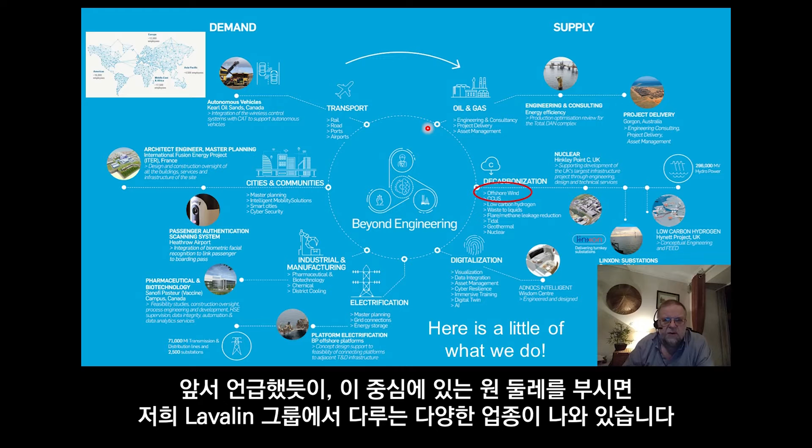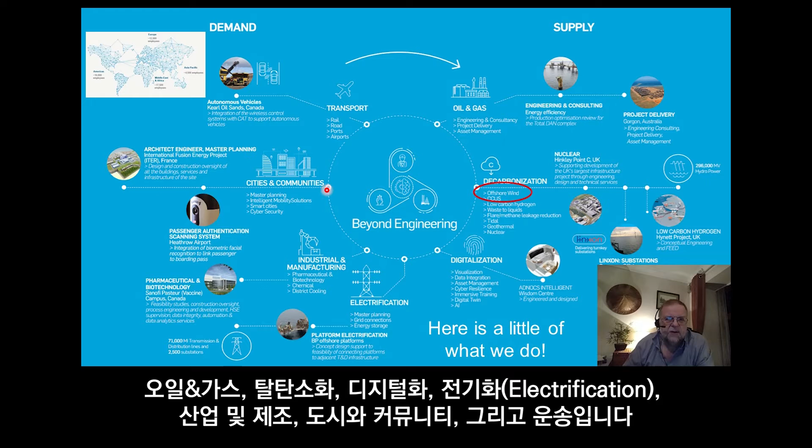Now here is just a little of what we do as SNC Lavalin. You can see around the ring in the centre here all the different industries that we work for: oil and gas, decarbonisation, digitalization, electrification, industrial and manufacturing, cities and communities, and transport, both catering for the demand for services and the supply of those services. Around the outside here we have some of the major projects that we've worked on.

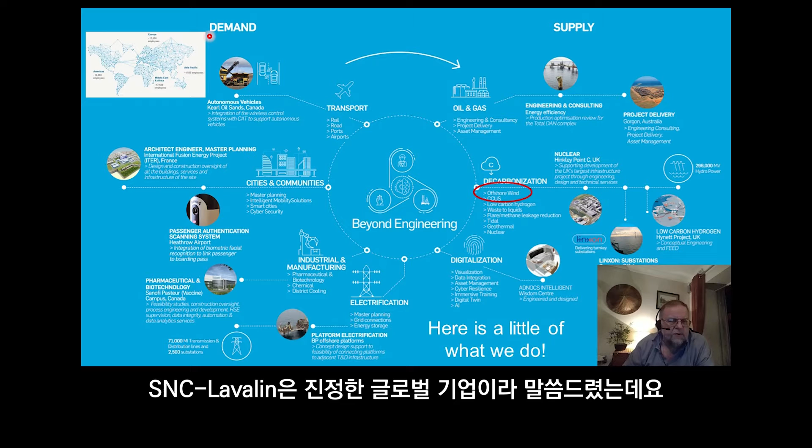Now, I mentioned that SNC Lavalin were a truly global company. We in fact work in 50 different countries throughout the world. We have 50,000 employees at the last count. Those employees are from 130 different countries in the world, and we speak 70 different languages.

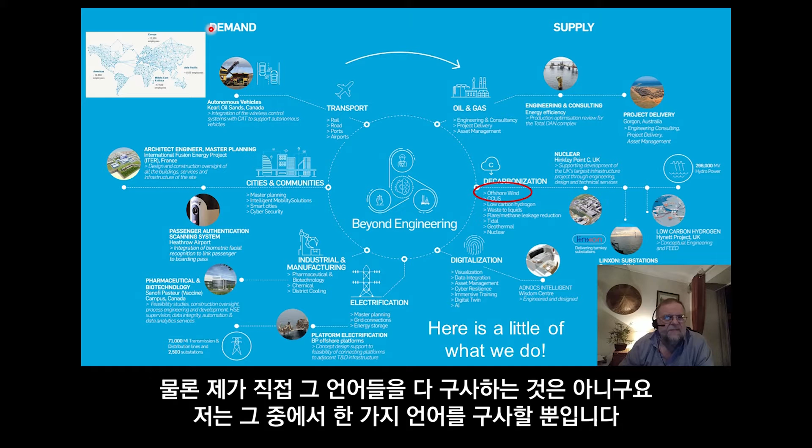Certainly not me personally, I'm afraid I only contribute one of those languages.

We undertake studies at various levels, from the overall design of the wind farm down to individual components. We handle permitting and consent for the wind farms. This is the main area that we're going to talk about today, the concept design of offshore wind farm support structures. We also do front-end engineering design and detailed design.

We don't operate installation vessels ourselves, but we do manage those. And we look after the structures throughout their life: asset management, operations and inspection, structural integrity management of those structures. And we provide a number of different services for the offshore wind sector as well.

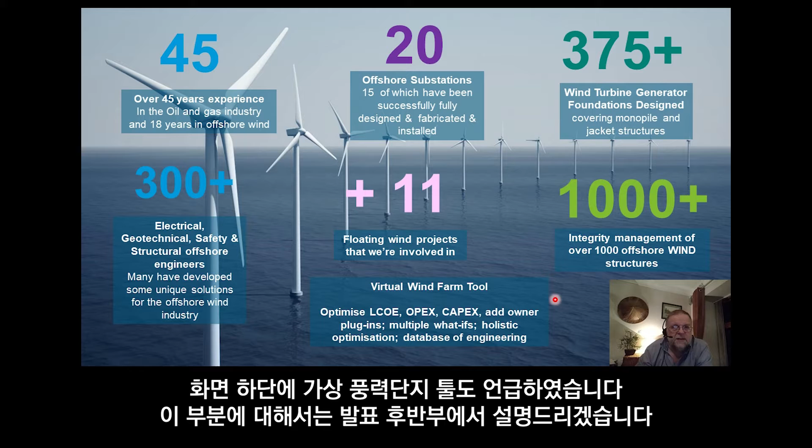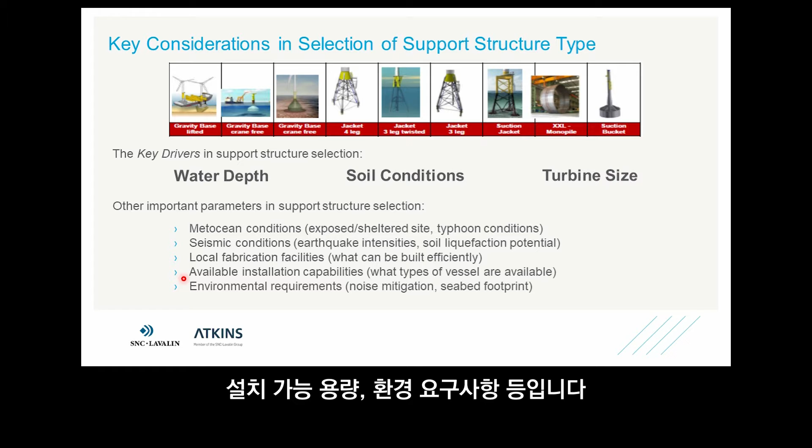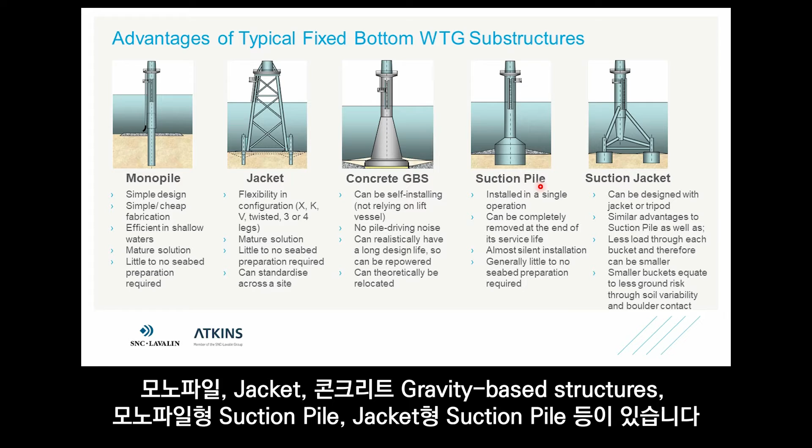The key drivers in support structure selection are water depth, soil conditions, and turbine sizes. There are a number of other parameters that are important in substructure design selection, such as the metocean conditions, like the wave and wind conditions, the seismic conditions, local fabrication facilities, available installation capabilities, and environmental requirements. There are a range of typical fixed-bottom WTG substructures available for designers to utilize, such as monopiles, jackets, concrete gravity-based structures, suction piles with monopiles, and suction piles with jackets.

Monopile designs have been utilized across the world. There are a number of benefits to these designs: they are very simple, they are easier to fabricate, they're very efficient in shallow waters, and they require little to no seabed preparation. Jackets are designed with either 3 or 4 legs with a range of different brace configurations. Again, they're a mature solution that requires little to no seabed preparation, with jackets suitable for deeper water depths.

Concrete gravity-based structures can be self-installing, as they don't rely on a lift vessel, there are no pile driving noises, and they can realistically have an extremely long design life, so can be repowered. Suction piles can be installed in a single operation and can be removed at the end of their service life. Installation is almost silent, and it generally requires little seabed preparation. Suction buckets can also be used with jacket designs, thereby reducing the load through each bucket.

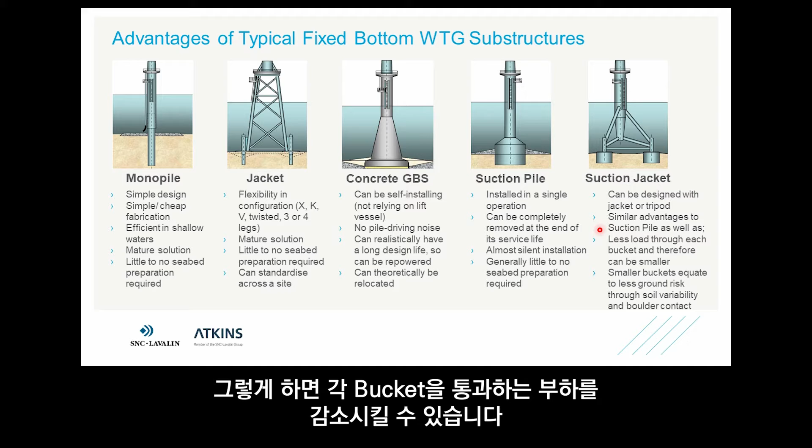Well, thank you very much, Matt. One key thing we're trying to bring out here is how rapidly the design of offshore wind turbine structures has been changing in recent years. Just 10 years ago, we were looking at turbine sizes up to 5 megawatts, rotor diameters less than 100 meters. Gravity-based foundations were being used in shallow water only, and monopile structures were restricted by the behavior of the soil and what diameters you could actually build.

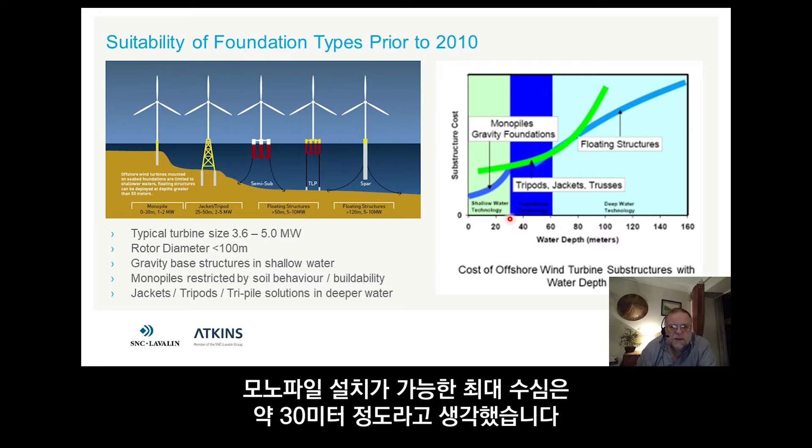Jackets, tripods, and tripiles were accepted in deeper water, but the industry anticipated that floating structures such as the spar structures at Hywind would be used for deeper water. The maximum water depth for monopiles was considered to be around about 30 meters. However, it was realized that monopile structures in particular were behaving better than was anticipated.

So this instigated the PISA project to look into the performance of soils for very large diameter monopiles, and that did indeed show that the soil performance was much better than originally anticipated for smaller diameter piles. Coupled with other technology improvements like the ability to roll larger diameter and thicker steel plate, improvements in installation vessels, pile driving technology, noise mitigation, and the fatigue performance of welded joints allowed monopile structures in particular to grow significantly in size.

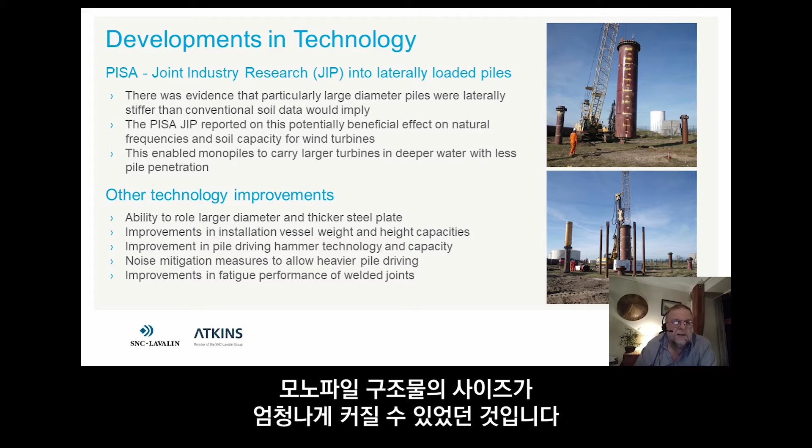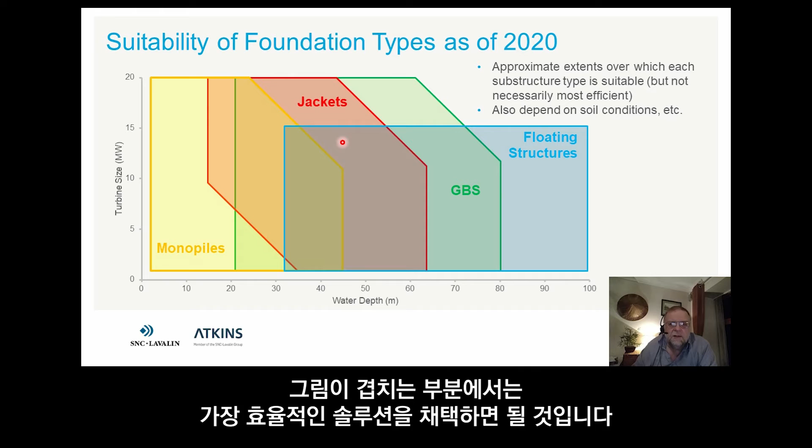As a result of this, the suitability of foundation types was able to be extended to consider larger turbine sizes and over deeper water before you have to switch to floating structures. So the approximate extents that are shown here show where those structures might be suitable, but where these diagrams overlap, then the most efficient solution would be chosen, also dependent on soil properties at the site.

As mentioned, soil conditions are a very important driver in the selection of substructures for wind turbines. In sand conditions, the suction piles tend not to be favoured because of the possibility of piping during the installation of the piles. Gravity-based structures tend not to be suitable on soft clay and would need dredging out of soft surface materials.

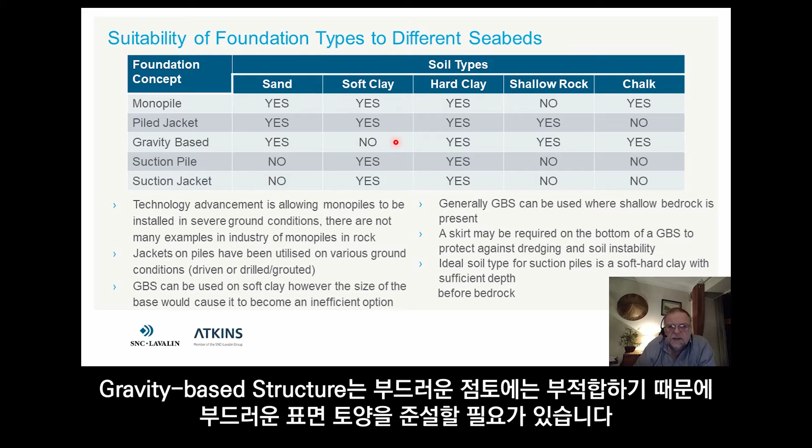And shallow rock tends only to be suitable for pile jackets, which can be drilled and grouted into that, or gravity-based structures which sit on top. And chalk soils are not good for piled solutions for jackets because of the reduced skin friction in weathered chalk.

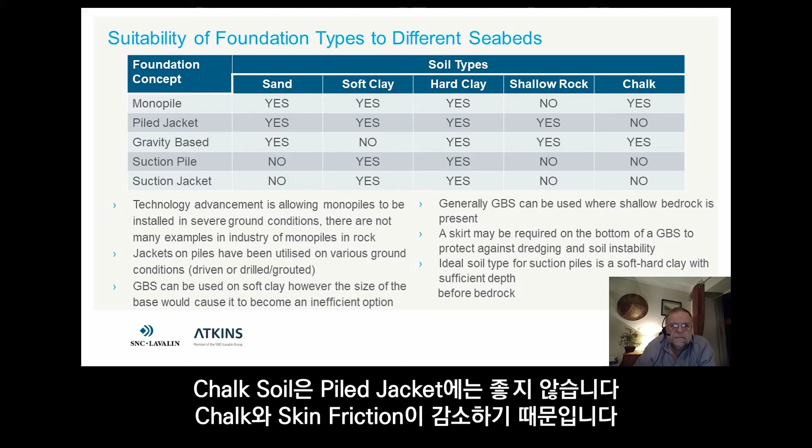Some other design drivers are worth mentioning for substructure selection. In seismic regions where there is a risk of soil liquefaction, then certain types of foundation may not be suitable. Where there are typhoon conditions, these give extreme loads on structure, which may well be limiting in design and restrict the type of substructure that may be selected.

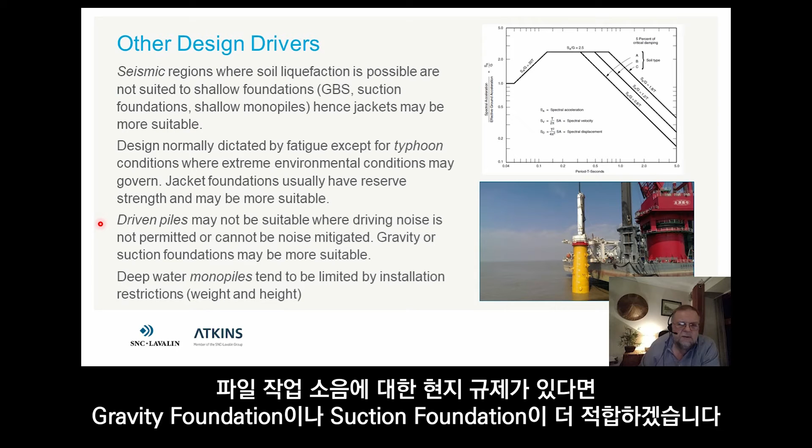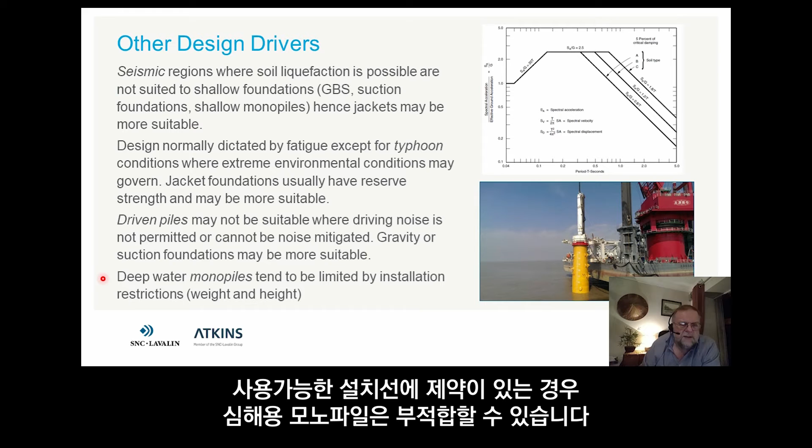Where there are local limitations on the noise of driving piles, then it may be more suitable to use gravity or suction foundations. And similarly, where there are limitations on the installation vessels available, then deep water monopiles may not be suitable.

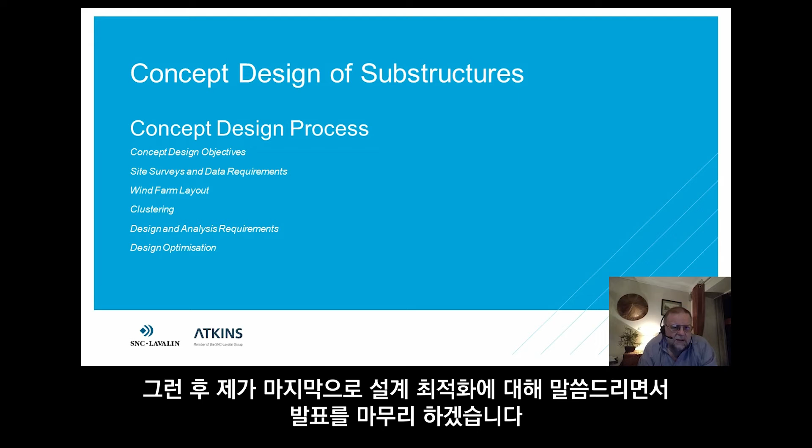Well, that introduced the types of substructure that might be selected for a particular wind farm. We'll now go on to talk about the design process which is used to progress the concept design. I'll start off by talking a bit about the objectives and the data requirements for that, and also a little bit about the wind farm layout. Matt will then take over and talk about some of the processes of selecting, clustering, and analysis requirements. And I'll finish off this presentation with an introduction to design optimization.

The process through the design of an offshore wind farm can vary quite significantly, but this figure is a fairly typical approach. Concept design followed by front-end engineering design followed by detailed design. In the concept phase that we're interested in here, we're taking the data about the site, and we're using that to decide on a layout for the wind farm, a selection of the turbines, support structure selection, how those designs of substructures are clustered into groups, and what the initial sizing of those are.

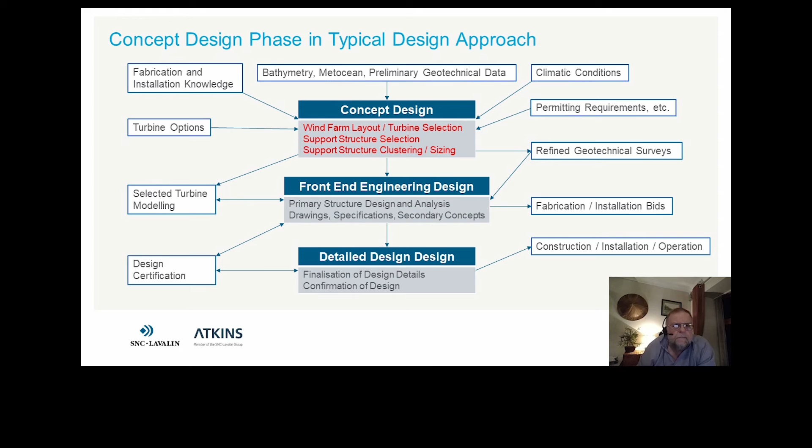That initial layout can allow us to do more refined geotechnical surveys, to use data from the selected turbine manufacturer, and to use that information in a further design of the substructures. Some of the other presentations in this series of webinars will have described the data requirements for offshore wind farms. So I'll pass over this fairly briefly. Initially, though, we do need geotechnical data for the site for concept design. Subsequently, that would be refined for more detailed design.

We're looking for climate and metocean data, the effect of the environment on the structure, and we're also looking for the effect of the structure on the environment, i.e. what local wildlife is there, who else uses the local ocean, and if there is any risk of unexploded ordnance in the vicinity.

We feed all of that data into a tool that allows us to build a virtual model of a wind farm. Hence, it's called the Virtual Wind Farm tool. It takes all of that initial data, works out what the wind energy yield is, the amount of power that you generate from the wind farm, takes into account local databases of turbines and fabrication and installation facilities. And then it allows the selection of the turbine type, the substructure, and/or the foundation concept by accumulating the through-life costing of the development.

That covers the design, the fabrication, the installation, the operation and maintenance, the decommissioning, and the financing of the wind farm. And finally, we can work out from that the capital expenditure, the operational expenditure, and the levelized cost of energy. And that allows us to select the most efficient design for that particular wind farm.

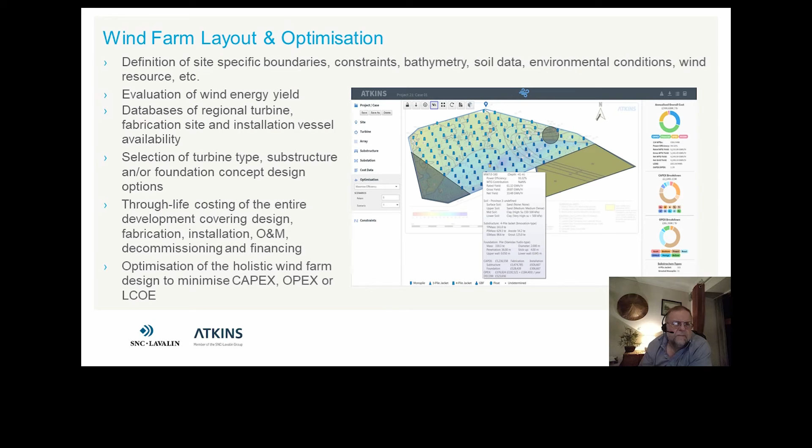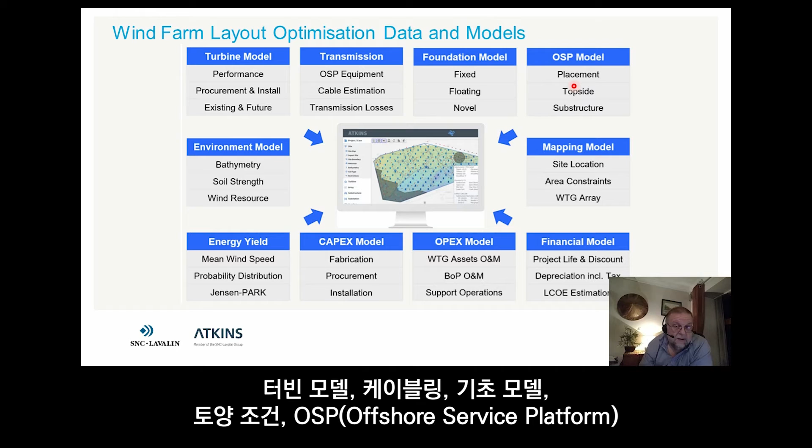This is an illustration of all the data that feeds into that optimization process. The turbine model, the cabling, the foundation model, the soil conditions, the OSP, the offshore service platform, the environment, the energy yield that you're getting, the capital expenditure from building and installing the sites, the operational expenditures, the locations of the individual turbines, and the financial model, how much it's going to cost to do that development.

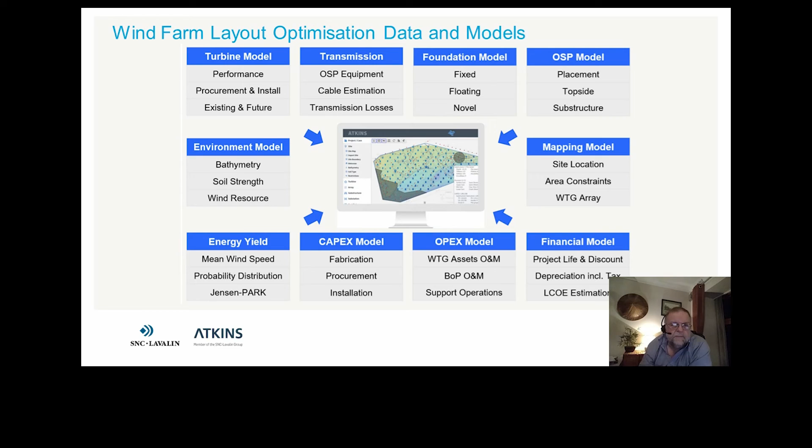Clustering is the grouping of designs to standardize construction and reduce design and analysis schedules. For example, if you have a site with 50 WTGs, you don't want to design a single structure to fit all 50 sites. You may want to design 4 or 5 different substructure groups or clusters. Clustering is dictated by the water depth variability across the entire site and the soil variability.

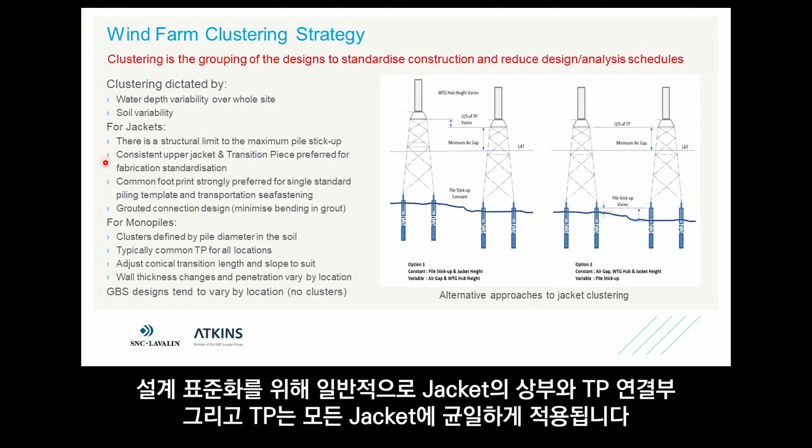For jackets, there's a structural limit to the maximum pile stick-up that you can use. For standardization and design, the upper part of the jacket and connection into the transition piece and the transition piece itself tend to be standardized across all the jackets. A common footprint across all clusters is strongly preferred, as then it only requires a single standard piling template, and it makes transportation easier due to requiring one configuration of sea-fastening.

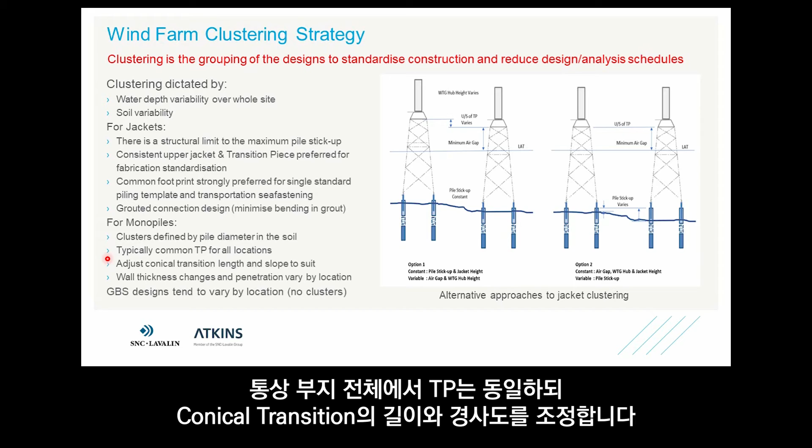For monopiles, clusters are defined by the pile diameter in the soil. Typically, they have a common TP across all sites and require a different conical transition length and slope to accommodate. Wall thicknesses and pile penetrations vary by location. Gravity-based designs tend to vary by location, i.e. clustering is not required.

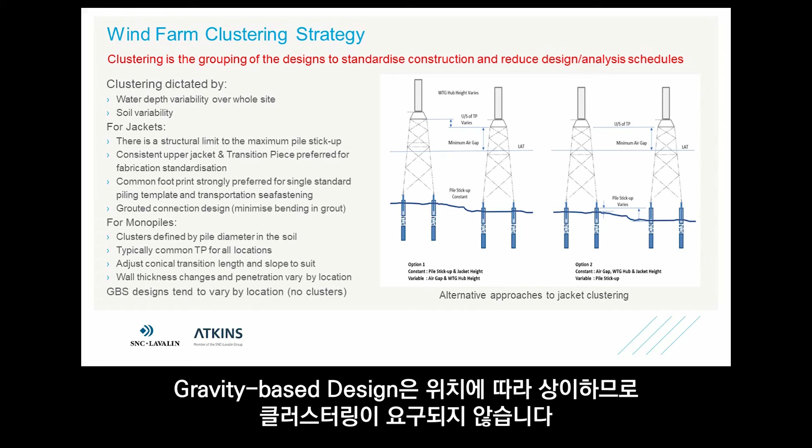When designing WTG substructures, the dynamic effects of the turbine in sea states must be accounted for. Turbine dynamic loads include the rotational frequencies such as 1P, which is a full rotation of all the blades, wind turbulence, the effects of each blade individually passing the tower, which is the 3P frequency, and the blade natural frequencies. The natural frequencies of the turbine, often known as 1P, 3P, 6P, and moving upwards, are often given as fixed values or a range of values in a Campbell diagram.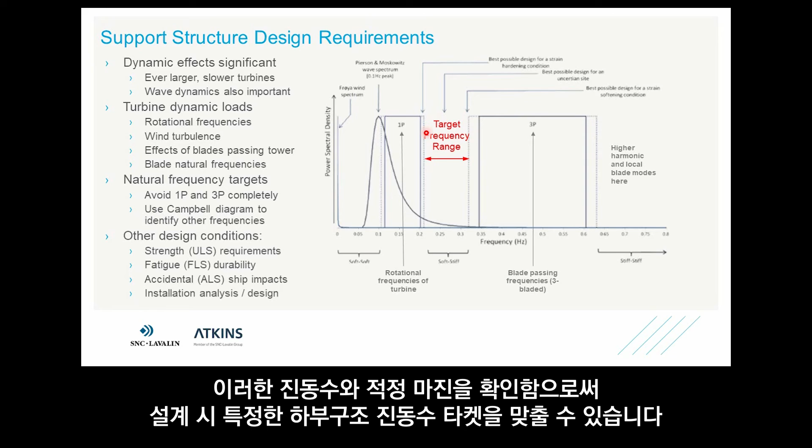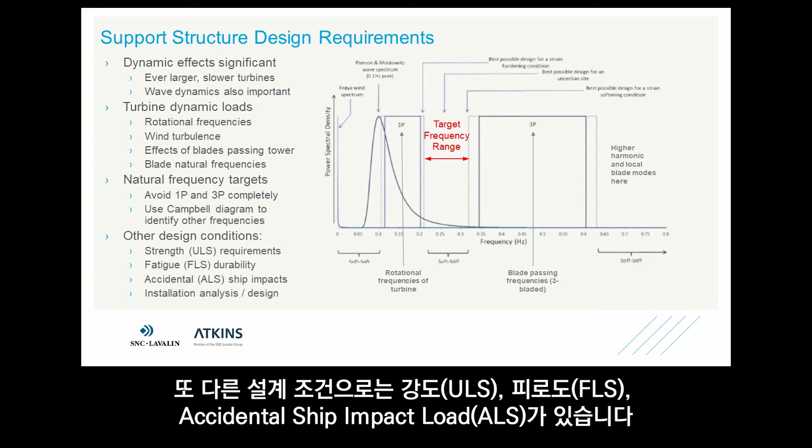Understanding these frequencies with the relevant margins allows for designers to target certain substructure frequencies. Other design conditions include strength, also known as ULS, fatigue, known as FLS, and accidental ship impact loads, known as ALS. Additional installation analysis may be required, such as transportation, lift, or on-bottom stability.

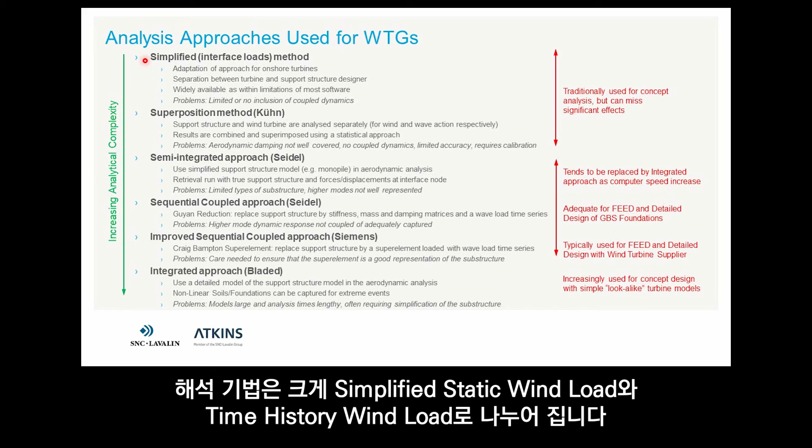There are a number of analysis approaches used by substructure designers, each with increasing analytical complexity. Broadly speaking, the analysis methods can be split into simplified static wind loads and time history wind loads. The simplified interface loads method is the crudest and is often used for preliminary concept design. This assumes that the turbine loads can be simplified and statically applied at the tower and TP interface. For example, a single point load, representing the maximum turbine load experienced, might be applied at the interface point. However, as the loads are simplified, there is no inclusion of dynamic effects and the method has limited accuracy.

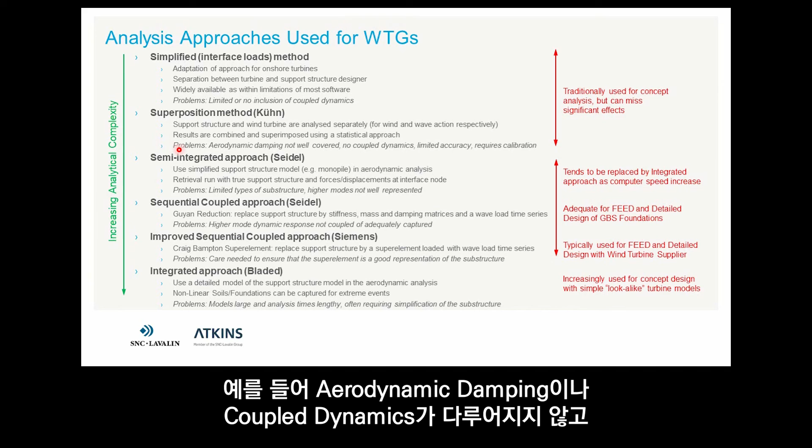The superposition method allows for fatigue analysis to be performed using simplified loading. This assumes that the wind and wave fatigue analysis can be performed separately before combining with statistical approaches. The wind loading is simplified to a range of statically applied loads at the interface, representing turbine loads for different conditions across its life. The method can be used as a preliminary approximation of the fatigue lives. However, there are a large number of simplifications for this analysis type, such as aerodynamic damping is not well covered, the coupled dynamics are not covered, and it has limited accuracy.

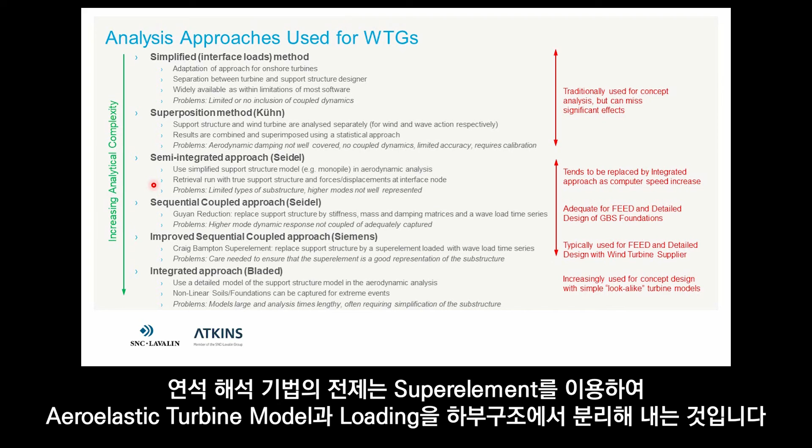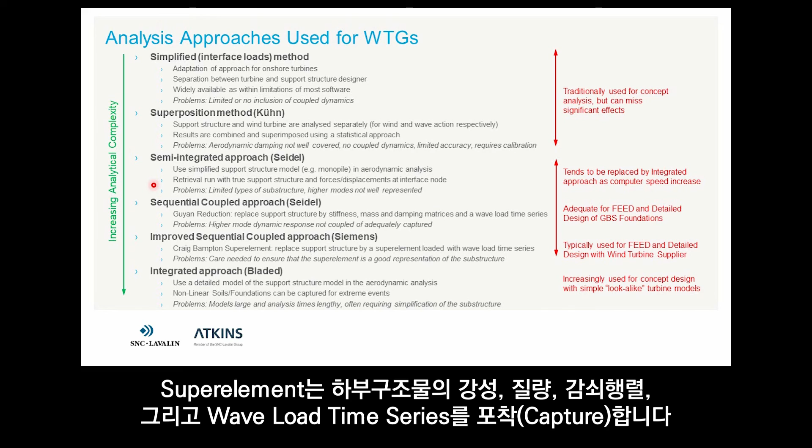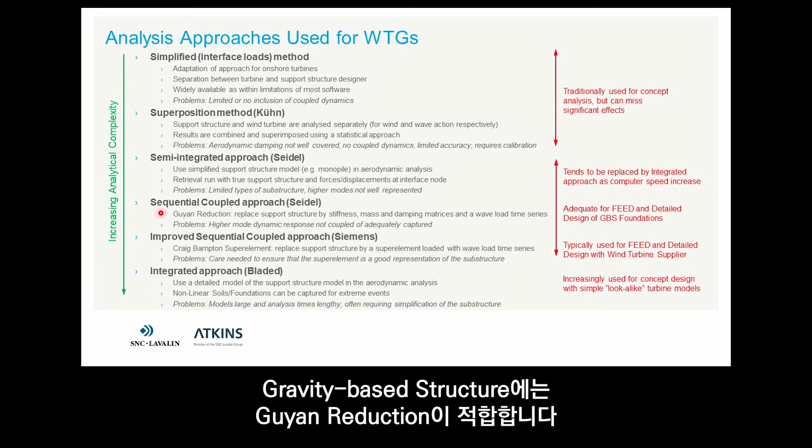There are a range of coupled analysis methods available. The premise of these is to separate out the aeroelastic turbine model and loading from the substructure through the use of superelements. The superelements capture the substructure's stiffness, mass, and damping matrices, along with a selection of wave load time series. The superelements are fully linearized below the interface elevation, meaning that no nonlinear soils can be modeled. Guyan reduction is suitable for gravity-based structure design. However, it does not capture higher modes' dynamic response well, which aren't required for gravity-based structures. Therefore, it isn't suitable for jackets or monopile design.

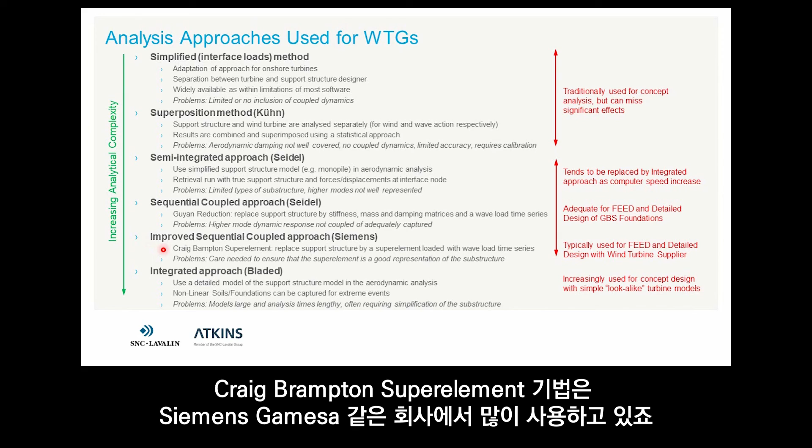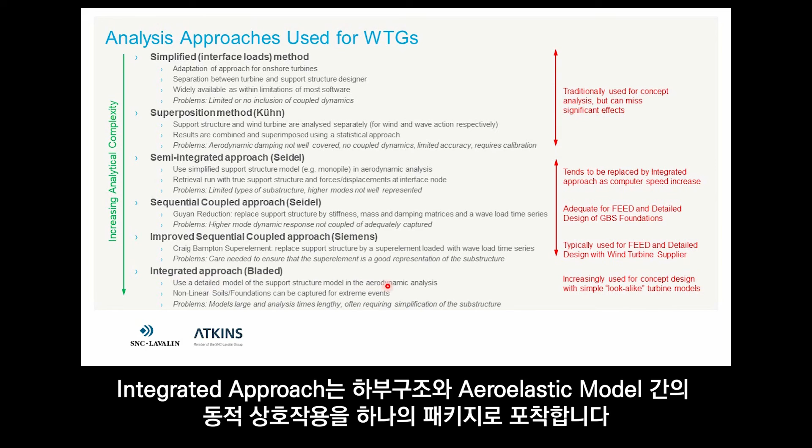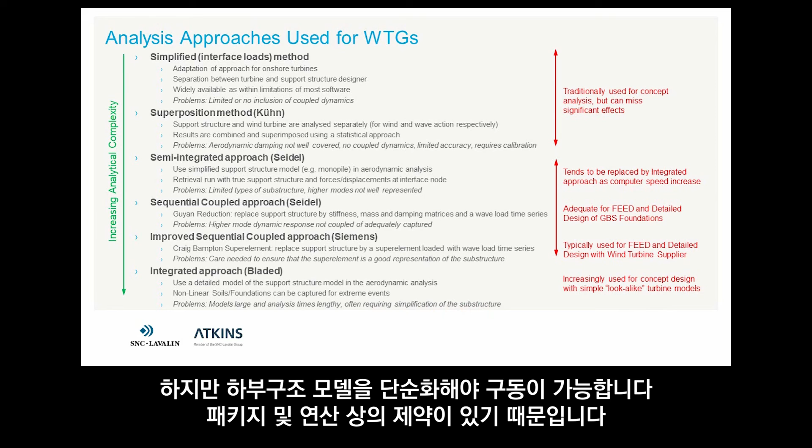The Craig-Bampton superelement method is widely used by companies such as Siemens Gamesa. This method of reducing the superelement captures the higher modes more accurately and as such can be used for monopile and jacket design. The integrated approach captures the dynamic interactions of the substructure and the aeroelastic model in a single package. The wave and wind time series are captured simultaneously in the single software, without the need of superelements. This allows for nonlinear foundations to be captured. Packages such as DNV-GL's Bladed software allow this to be done. However, the substructure model often requires simplification to run due to the package and computational limits.

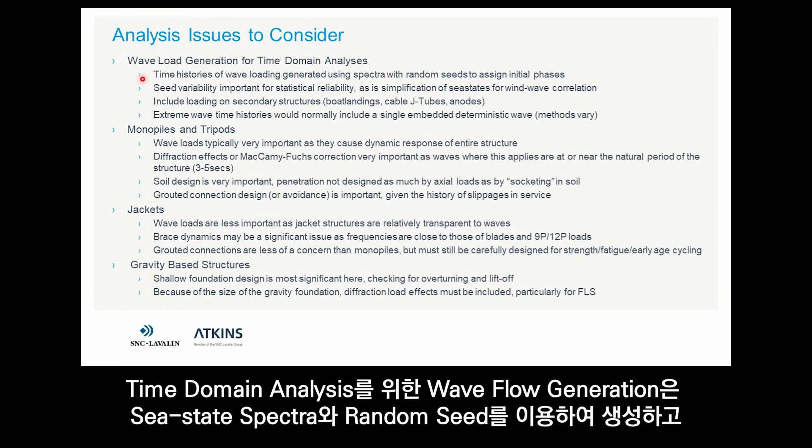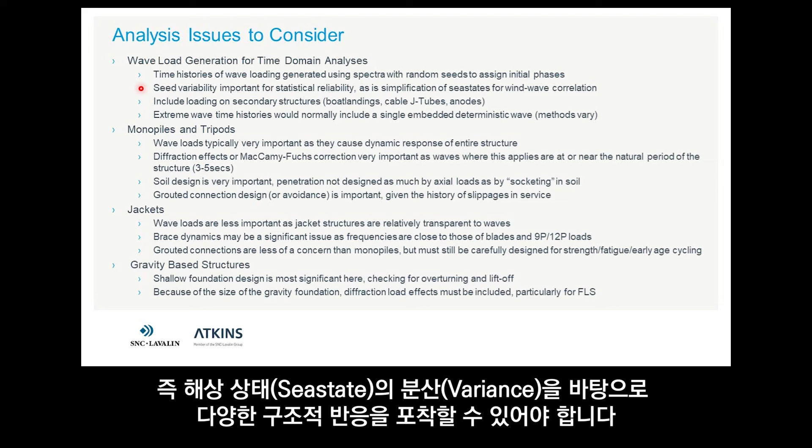Wave load generation for time domain analysis is generated using sea state spectra and random seeds to assign initial phases. Seed variability is important for statistical reliability, i.e., we require a variance of sea states to ensure a range of structural responses is captured. As much as possible, loads are generated on the full structure, including any secondary steel like boat landings or J-tubes for the cabling.

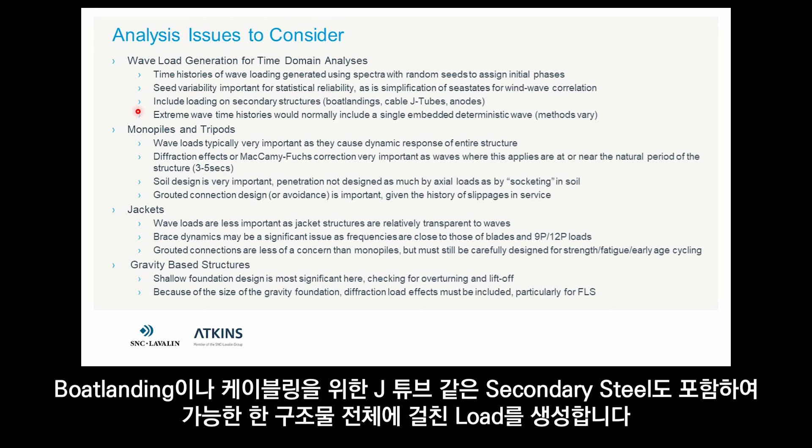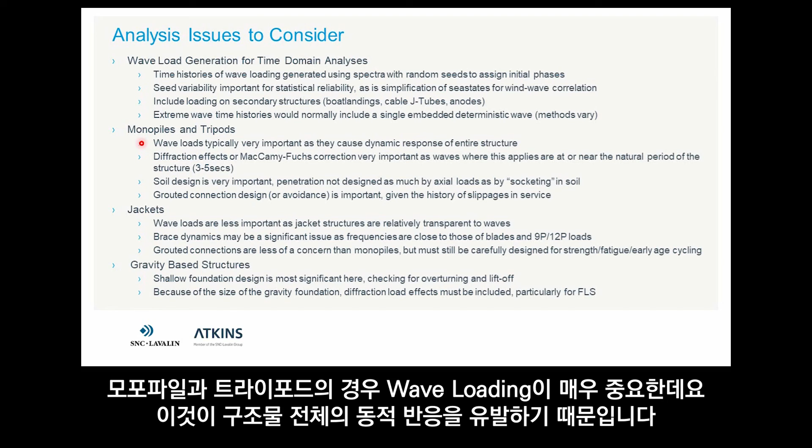Extreme wave time histories for the strength ULS analysis include a single embedded deterministic wave, such as the 50-year extreme wave. For monopile and tripods, wave loading is typically very important, as it causes a dynamic response of the entire structure. Capturing diffraction effects is very important due to the resonance of the structure and the waves.

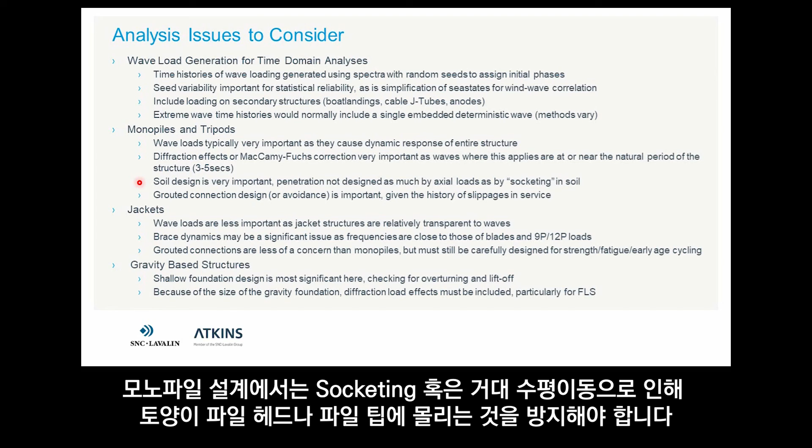Monopile design is often governed by ensuring that socketing or large lateral movements don't allow soil to be compacted at the pile head or tip, as this would reduce the contact pressure of the soil and piles at these locations. Grouted connection design is also extremely important for monopiles.

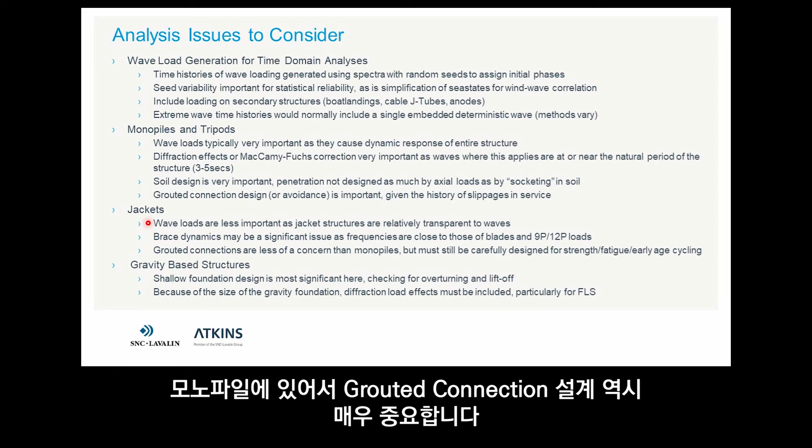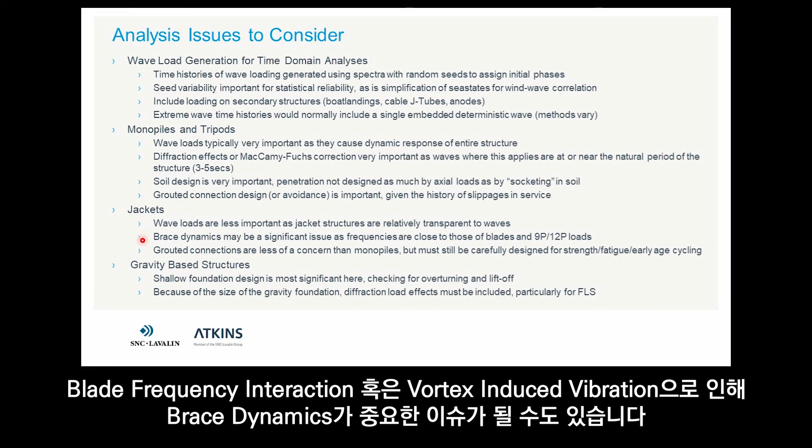For jacket design, wave loading is less important due to the structure being relatively transparent to the waves. Brace dynamics may be a significant issue due to the blade frequency interactions or vortex-induced vibrations. For gravity-based structures, shallow foundation design is critical, checking for overturning and liftoff.

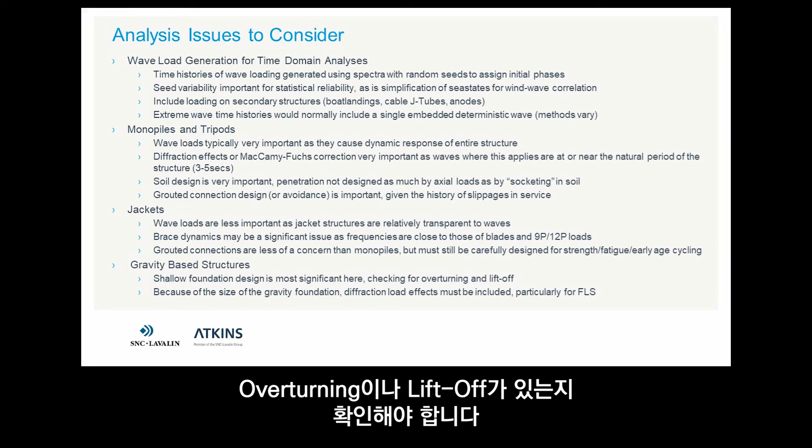Concept design considerations for monopiles, jackets, and gravity-based structures can be seen here. For monopile designs, the key considerations are the WTG frequencies, the type of transition piece, the diameter to thickness ratio of the steel, the scour protection system, and the connection type to the TP.

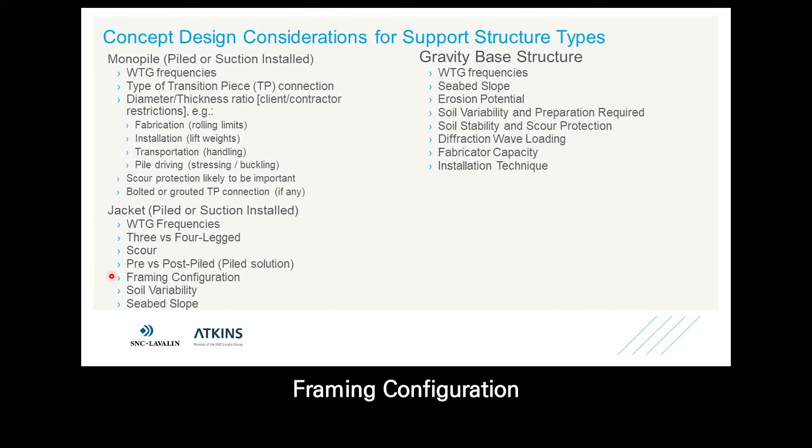For jackets, the key considerations may be considered as the WTG frequencies, whether the jacket will have 3 or 4 legs, scour protection, pre versus post piled solutions, the framing configuration, the soil variability, and the seabed slope.

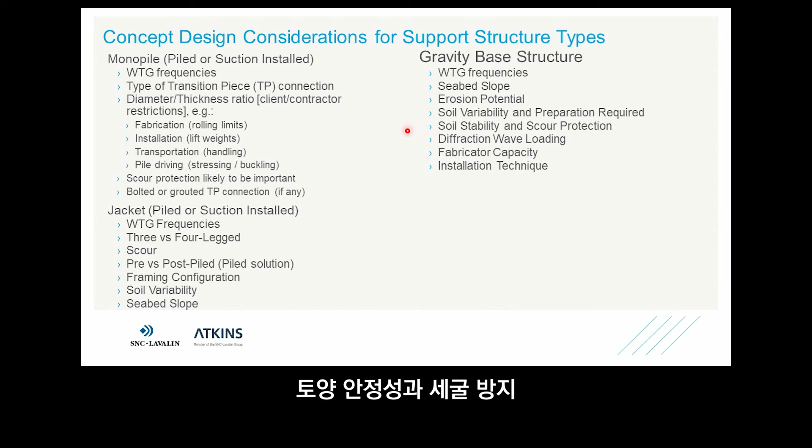For gravity-based structures, the key considerations are the wind turbine generator frequencies, the seabed slope, erosion potential, soil variability and the required preparation, soil stability and scour protection, diffraction wave loading, the fabricator capacity, and of course the installation technique.

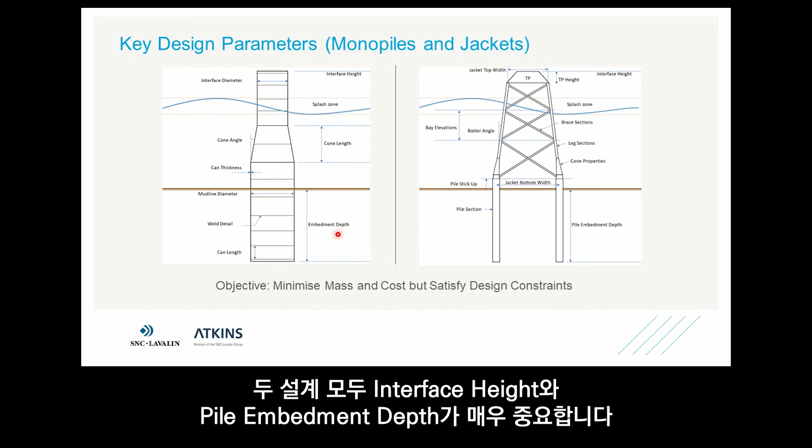Typical jacket and monopile designs can be seen here along with the key parameters. The objective of each of these designs is to minimize mass and cost, but satisfy design requirements. For both types of structures, the interface height and pile embedment depth are critical. For the monopile design, key requirements might be the interface and mudline diameters, the cone dimensions, and the wall thicknesses.

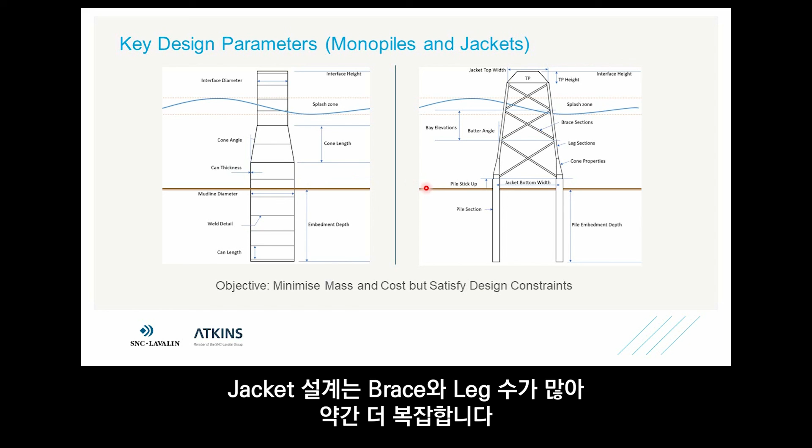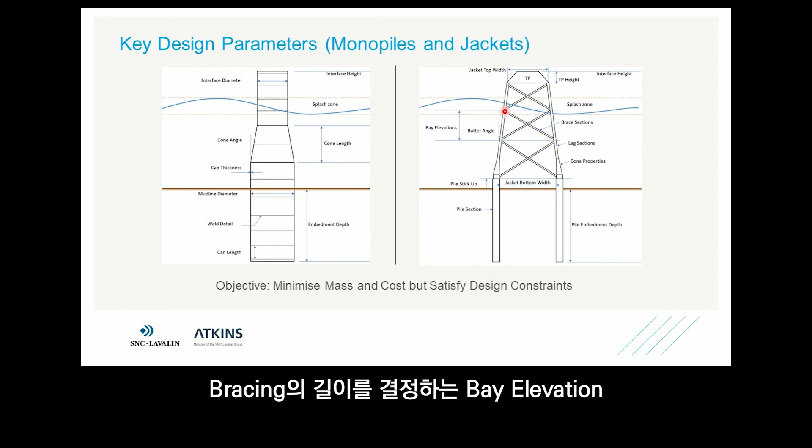The jacket design is slightly more complex due to the number of braces and legs. Key considerations are the width of the jacket at the piles and at the TP connection, the pile stick-up, the bay elevations, which dictate the length of the bracing, and the sections of the legs and the braces. Although this list isn't exhaustive, it gives you some idea of the number of considerations required for the designs.

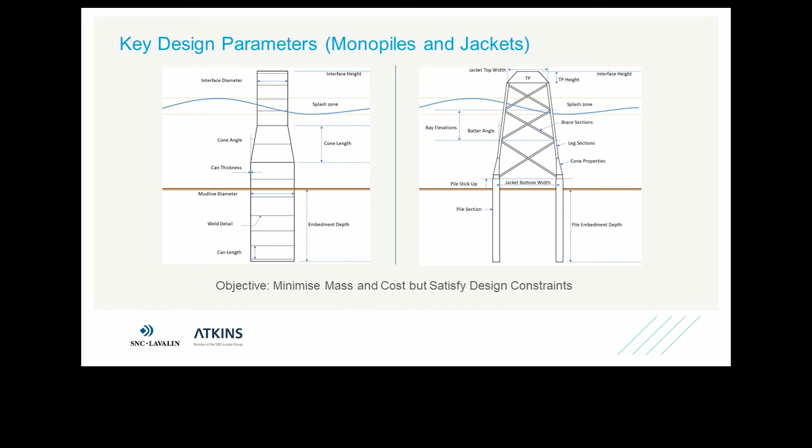Well, thank you, Matt. I'd like to finish with just a brief mention of design optimization. Not only do we optimize across the entire wind farm using the virtual wind farm tool, but these days we can also optimize the individual designs of support structures at locations across the wind farm. And we do that by taking the design and analysis process that Matt has described and building that into an automated workflow. We also put into that the various constraints and the logic by which the design is achieved.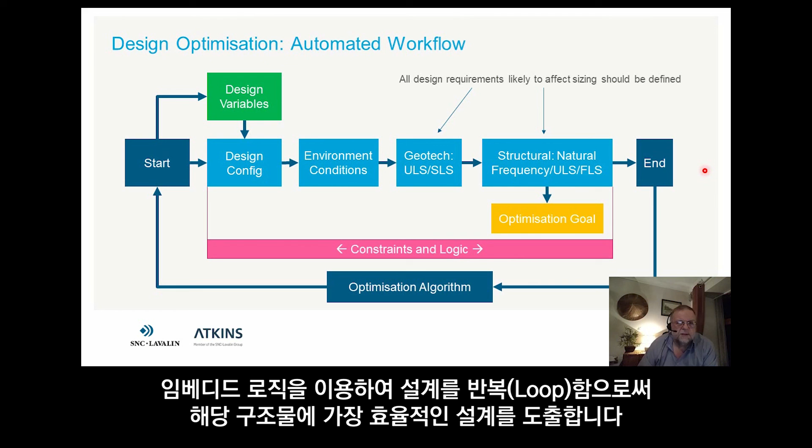And then we embed all of that into a design optimization loop, which will loop through the design using embedded logic to come up with the most efficient design for that particular structure.

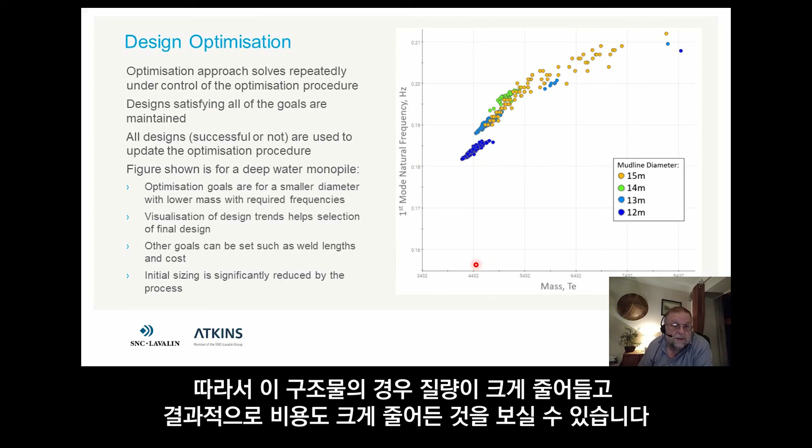And here are some results of the optimization process. You can see in the figure on the right here that the mass and the diameter of an offshore monopile support structure have been reduced by successive optimization steps, while also always maintaining the design goals that we set for the simulation. So you can see the very significant reduction in mass and hence cost that was achieved for this particular structure.